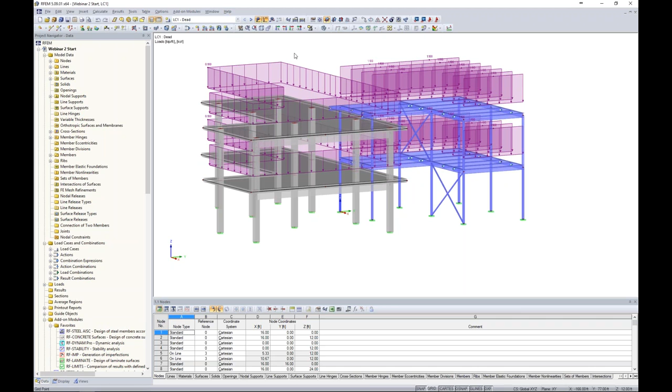Previously we loaded the structure, and we ran our load combinations and got a full analysis. Now that isn't always the case. Sometimes we go to run an analysis after we have loaded our structure, and for example, we have loaded our structure with dead load here. Previously everything ran great, but as we know with any finite element software, that doesn't always happen. So when we go to run this first load case here, as we know from RFEM Webinar 1, this is running according to a linear analysis, and we immediately get an instability.

So instabilities are nothing new despite what program you're using, but I want to show you these features that make our lives a little bit easier within RFEM. The first thing to know is the text about the specific instability. It says this model is unstable. The instability is found at FE node number 64, direction Z. So it immediately gives me a location and tells me that there's some type of issue in the global vertical direction.

The model is statically underdetermined. When I close out of this error message, you'll see that my big red arrow shows me exactly where FE node number 64 occurs. Now, I'm not going to say that 100% of the time this big red arrow is going to point out our issue.

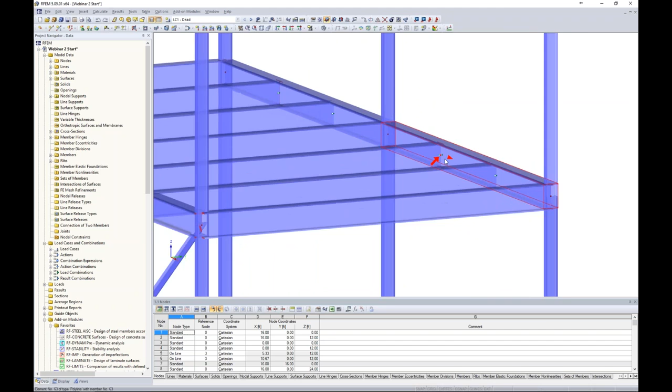But a lot of the times this really is where the issue is occurring. So when I scroll in here, I really don't see anything immediately. When I turn it to a wireframe model, okay, I can zoom in here and see that I forgot to connect my node here of my beam to my transverse beam. Well, that's no problem at all. I can just easily drag and drop that to connect those two members.

So you can imagine that when we have a huge model with a lot of members and we get this error message for an instability, that red arrow is a huge benefit to really narrow down on where that issue is occurring, rather than it being like finding a needle in a haystack, trying to determine if a node isn't connected someplace.

So now we can go and run our load combination again, or this particular load case. We run it. Everything appears to run okay this time. We immediately get our deflections here, which we can decrease the deformation factor.

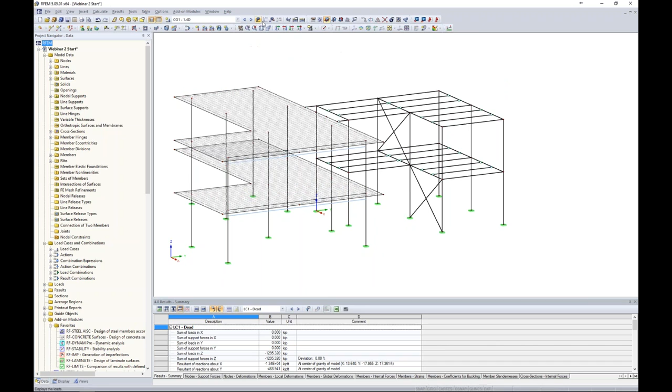So that's great, but now we need to run our first load combination, 1.4 dead load. This is just a load combination from ASCE 7. I take a look at my applied loads. It's applying that 1.4 factor to all of my dead loads, our surface loads and line loads here. Turning this back into the rendered view, I begin my first load combination analysis.

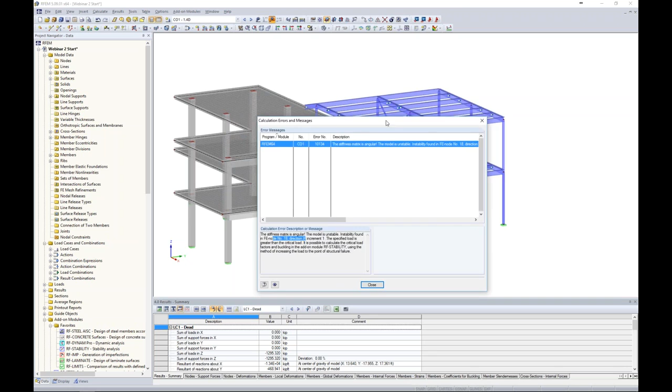And lo and behold, we get another error message. So it's another instability, but this time our text is a little bit different. It says our model is unstable and the instability is found at this location, direction X. So we have a little bit of a different direction affected now. But this says a specified load is greater than the critical load. So this tells me that at this particular location I probably have some type of issue with buckling because the specified load is greater than the critical load.

Well, I can close out of this error message and zoom into this big red arrow here. Maybe I turn this into wireframe. I see that everything is connecting fine. So I don't really understand where this error message could be coming from.

Well, this is where we can utilize our add-on module RF Stability. So from our long list of add-on modules over here on the left in our project navigator, we can launch RF Stability. As you can see, this is just a simple dialog box that pops up within the program, and it allows us to do an eigenvalue analysis for a few different eigenvalues based on the buckling behavior of our structure. And what we can do is import different axial forces from either load cases or combinations.

Now, because I was able to solve for my first load case, dead load, just fine, it makes sense to import those axial loads to see how the structure is behaving based on those applied axial forces. Now, we have quite a few other settings here that I won't get into in too much detail, but we do have an option down here to calculate an eigenvector for an unstable model. So this is if I couldn't get the model to solve at all, so that the causes of the instability can be checked graphically. This is a feature too if we couldn't even get our dead load to solve.

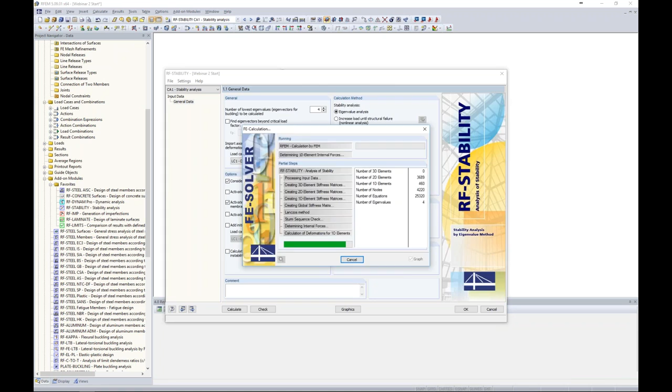Now for this, I will run the calculation and it quickly runs the 4 different eigenvalues. And I'll now see my results available in my tables here. So you'll see I'll have 2 different columns. The first is the critical load factor.

Now the critical load factor is just a factor that I can multiply that applied dead load by before I'm going to see the associated buckling behavior. We have 4 different eigenvalues, so the critical load factors are listed here in ascending order. So probably our most important one would be this first eigenvalue. Now the magnification factor is just a relationship between the moments of a linear static analysis and a second order analysis. So essentially my first order moment times my magnification factor is going to give me my second order moment. But now we're a little bit more concerned with this critical load factor.

So if I take a look at my graphics, we're still in this add-on module RF Stability. We can see that with our drop-down box here, and I have my 4 different eigenvectors here. Looking at the first eigenvector, we can see the buckling behavior of this structure.

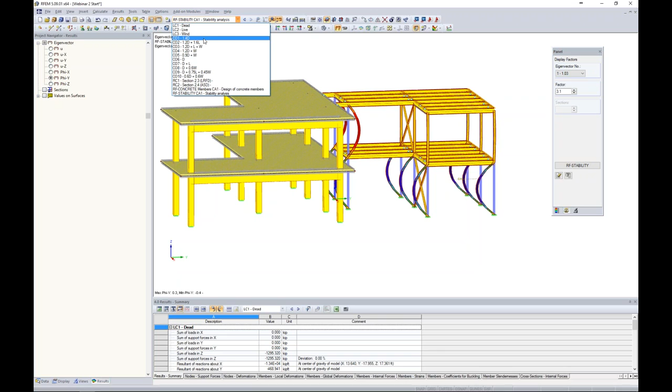Remember, I can only multiply my dead loads by 1.03 before I'm seeing this type of behavior. If I take a look at the other eigenvectors, same type of behavior. It all has to do with these slender columns here. So you can imagine that when I multiply my dead load by 1.03, I see this buckling behavior. So when I'm trying to run 1.4 times my dead load, that's where our instability is coming from. These members simply can't handle the applied loads.

So back under my data tab, at the very top is all of my input data. I can take a look at my cross sections, for example, maybe turn off my results here from RF Stability. I click on my first cross section defined. It's a W6x9, that's a very small number. So perhaps I want to increase that to something a little bit larger.

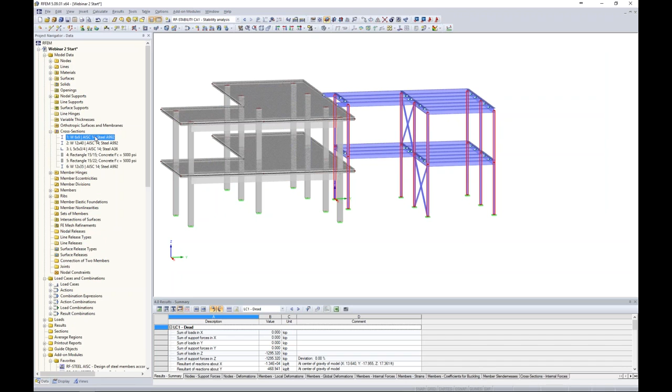Well, I can just right click and edit all of these cross sections at once because they are assigned to a single cross section within the program. Open up my cross-section database, and here are all of my AISC shapes. So we would like to choose something more like a W10x49, much bigger than a 6x9. Still an A992 steel is okay, but obviously we're going to have a bigger cross-section here. So I click OK, and it's asking me to clear my results.

So now when we go to run our 1.4 dead load, run the analysis, everything should run fine because now we have a little bit more of a sturdier member there and we don't see that same buckling behavior. So you can see how RF Stability is extremely useful, not only if you just have an instability, but if you want to see the different buckling modes of your structure. I did a few other webinars where I utilized RF Stability to export as imperfections as well.

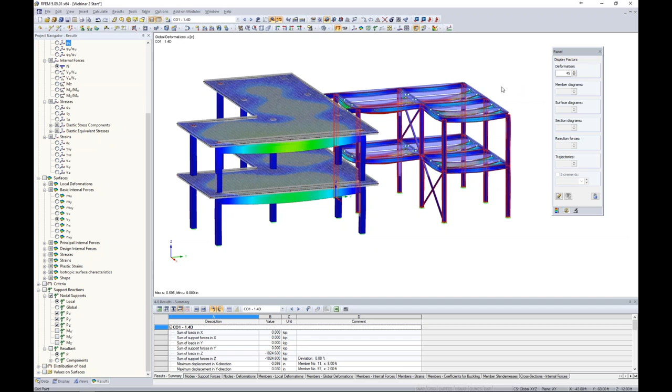Okay, so now that we have addressed instabilities, I'd like to move on to singularities. And the first thing to do is to turn off our results, and let's take a look at our top surface here of our concrete structure.

So if I drag my selection toolbar or selection box over that top surface, I can use my drop-down box here to create a visibility by selected objects. Now you can always right-click and show the hidden objects in the background if you'd like, or you can right-click and turn that off so that we get a clean view of only our structure that we've selected.

Under Views, I can create a new visibility, and we'll call this Top Slab. I click OK, so now I have this user-defined view under Views that I can always refer to despite whatever view I'm currently in. So this is the case when we go to show the hidden objects in the background and we show a wireframe view, that members are always 1D elements in a finite element software. Now our surfaces are 2D elements.

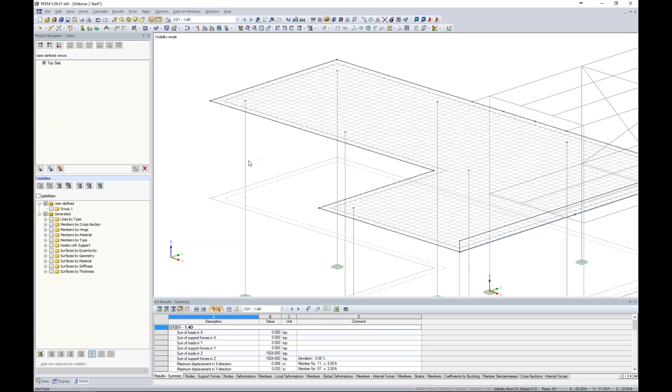But the problem is that where we intersect this column to the 2D surface, you can see here that the intersection occurs at this teeny tiny FE mesh element right here, the single node point. So we can imagine that all of our force transfer is occurring at this single point. So inevitably we're going to get very high stresses, very high forces. If we go to do design of this concrete slab, we're going to get high reinforcement simply because it's a product of the high internal forces at this location.

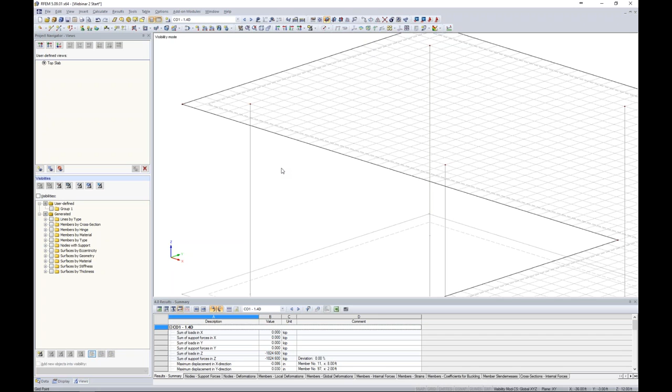Now in reality, when we render this, these columns are 15 inches by 15 inches, so we are going to get some load distribution. And like I said, this is not just for our program RFEM, this is common in any finite element software. So what tools do we have available in RFEM to help us address this so that we are not overly designing our structure?

Well, the first thing, what I'm going to do is jump to a different model here that I have saved, and I have gone ahead and used our add-on module RF Concrete Surfaces to do my reinforcement design. Now I have an entire hour-long webinar dedicated to just surface design using this add-on module, so we won't get into it today. But again, if you are interested in how we can do reinforcement design for this, refer to that YouTube video.

Once we run our analysis in RF concrete surfaces to get design per the ACI, we have our different required reinforcement. The first is AS1 in the top direction. Judging by this red arrow, we can see the reinforcement direction, and you'll notice that where these columns are framing into the slab, we have high reinforcement given there. The same goes for AS2 in the other direction.

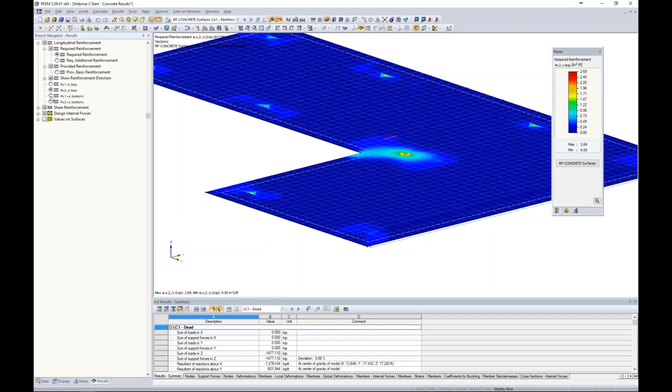Now, when we're looking at AS1 at the bottom, it's not the same, which makes sense. We have a lot of bending at the bottom of our slab between our columns, so that's where most of our bottom reinforcement is going to be. Same with AS2 at the bottom in the other direction.

Now, focusing on AS1 top for our slab with this particular reinforcement design - this is nice in terms of our contours, but perhaps we'd like to see this in a more numerical value. We can do so with sections, and with our first section, up in the dropdown we can create a new section numerically. But before that, right next to it, we have the option to completely turn off our ISO lines. These results will still be available, but I'm simply turning off those ISO lines to make my section cut right down through the center of my slab.

A section is exactly what you would think of it. It's going to give me the internal forces, or my results, at that particular location. So we can create this section numerically.

The first thing I need to do is give it a section name, section 1. It will be a section cut through my surface, and I can apply this to my single surface number 2 by clicking on that graphically. The next thing to define is my start and end points for the section.

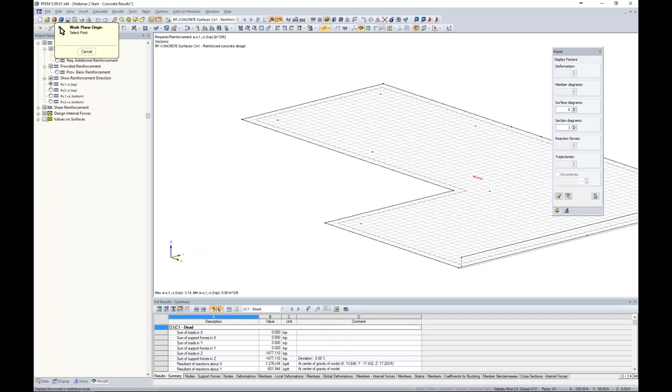What I like to do is turn on my drawing grid down here, activate that at the bottom, change my origin for my drawing grid, and choose my two points by zooming in, right down that column line. My second point will be located at the second end of my slab, and because of those AutoCAD-like features, the program does a great job of snapping to the points I'd most likely want for my section. Now, for the section on surface, the projection direction, we can have it in the global X, Y, or Z orientation, or define our own vector if we want it at some angle.

Once I click OK, it immediately brings me into the results diagram for my section, and you'll see the exact same results we were viewing in RFEM. In particular, we take a look at our reinforcement design per RF concrete surfaces - here are those spikes in reinforcement where our columns are framing into our surface. I think we can easily say that this is being over-designed for those internal forces.

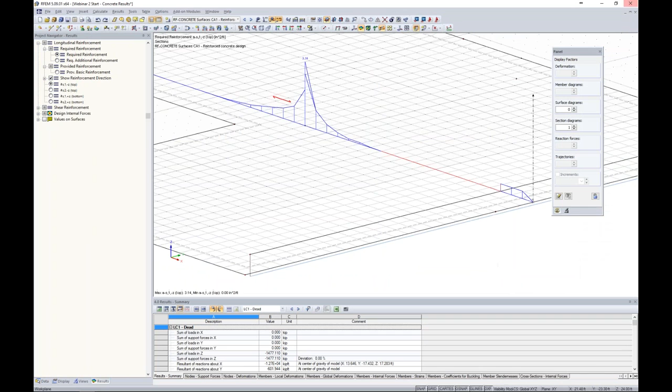Now, I can always exit out of here and view these sections graphically on my surface as well. So going back to the results diagram by right-clicking, I want to show you guys a useful feature called smoothing ranges. Up at the top is the option to edit our smoothing ranges.

My first column occurs 3 feet from the edge of the slab. My second column occurs at 20 feet from the edge of the slab, and my third at 41 feet. So what I'd like to do is smooth out the range, maybe 1 foot on either side of the column for a 2-foot range there. This is to account for the load distribution that's occurring, which in reality the program is not accounting for.

So what we can do is define our different ranges. For example, for our first column, the beginning will be 2 feet and the end will be 4 feet. The program automatically calculates the length as a total of 2 feet for that first smoothing range. The second will be from 19 feet to 21 feet, and lastly, for our third column, it will be from 40 to 42 feet.

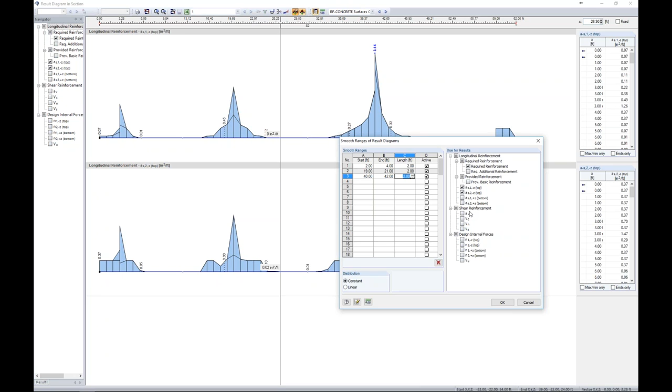The program automatically assumes that we'd like to apply these smoothing ranges to what we're currently looking at, but we can always activate and deactivate different results available here. Now when I click OK, you can see the smoothing range applied.

For example, column number 3, we went from 3.14 inches squared per foot to 1.65 inches squared per foot. So this is extremely useful in the sense that we can print this to our printout report.

We can even use this drop-down box to pull up one of our other load combinations. I'm going to clear out all of these result diagrams and just activate my MX and MY. Again, we're seeing those spikes in internal forces here. I can go back to my smoothing ranges and simply activate the checkbox for MX and MY for all 3 of these ranges, so when I click OK, you'll see the smoothing range applied here as well.

Now one thing to note, if we jump back to RF Concrete Surfaces, the smoothing ranges are shown here, but if I were to exit out, they are not shown graphically within the model.

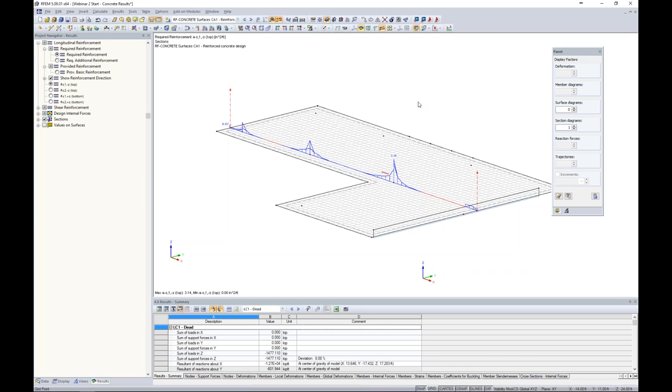So the question is, how can we apply this so the program actually designs for those average forces, rather than us just putting a fictitious number after our results are shown in the smoothing ranges? One thing I forgot to mention, if we take this section cut and highlight it, hold down the control key, we can copy it down this other column line to give us perspective on some high design forces at this location too.

So smoothing ranges are great, but if we go back to our data tab, we'll see these sections available here. We have section 1 that we just created, and here's our second copied section. There's another feature called average regions.

If I right click, I can create a new average region. For this, we want to apply it to a particular surface, so I graphically select surface number 2 here. You'll notice I have 3 different forms I can select for my average region: a rectangle, a circle, or an ellipse. For our particular case, our columns are rectangular in shape.

So it's probably most beneficial to use a rectangular averaging region. But maybe you have a circular column framing into this slab, so that can be utilized as well.

The next thing we want to do is define where we want to apply the center of the averaging region. We'll apply it to our first column here. For the dimensions, if we want to average it out over a 2-foot section for both our A and B dimensions shown in this picture, we can.

Now you have a lot of control over what internal forces you exactly want to average. The program assumes that for the local axes of our average region, U and V, we want to correlate those with the X and Y local axes of our surface. But in reality, we can activate all 4 of these if we just want to average out everything together, independent of what our local axes are doing.

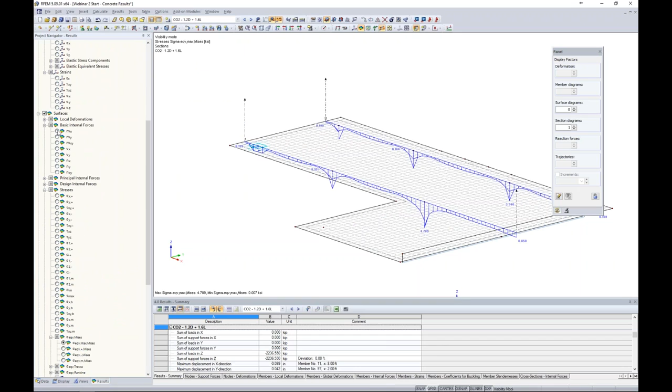So if we click OK, we get our first average region. Now, to make this very clear what we're doing, I'm going to jump to one of these particular load combinations, and under my results I'm going to activate my sections. So we're still viewing our sections here, but for my MX forces—this isn't my concrete design now, this is my internal forces MX.

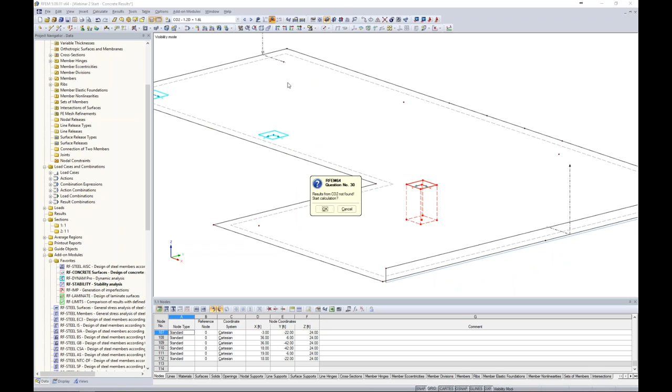Now with this average region, all I have to do is select it, hold down my control key, then take it, drag it, and drop it. It's asking me to clear my results, that's fine, and drag and drop it to some other region here. Now I can rerun that same load combination rather quickly, and we will see that average region now applied.

Now previously this was something like 83 kips per foot, so you can understand that this is now going to give us less internal forces.

Now if we jump back to RF concrete surfaces, it looks like we lost our results here, so I'm just going to quickly rerun that.

All this is doing is applying the ultimate limit state designs for all of my load combinations to do my reinforcement design. But what I want to show you with these average regions is that my AS1 top is still showing 3.16 inches squared per foot.

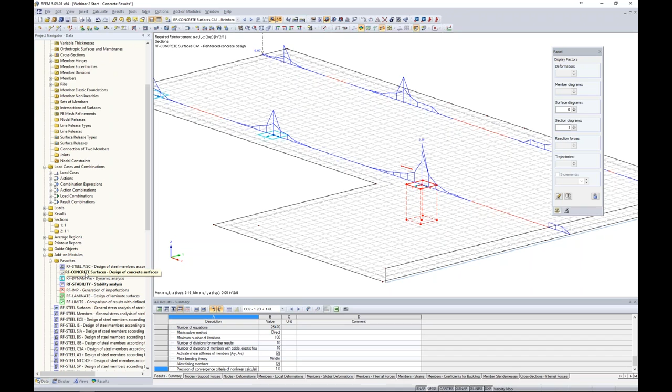So this average region did absolutely nothing to help us. Why is that? Well, back under the Data tab, under the Concrete Surfaces add-on module - for a more detailed look into this module, refer to our previously recorded webinar - but when using average regions for concrete design, under the Details tab, this option is default checked off.

What we'd like to do is apply the average internal forces for our ultimate and serviceability limit state designs, so now we want to check this checkbox. I click OK, I click OK.

We've lost our results again, but we can easily run a quick analysis, which solves rather quickly because now it's taking those average internal forces to give us our reinforcement design. So now we have gone from 3.14 to 1.83. This is how we can apply average regions to address singularities within the program, especially for something like concrete design.

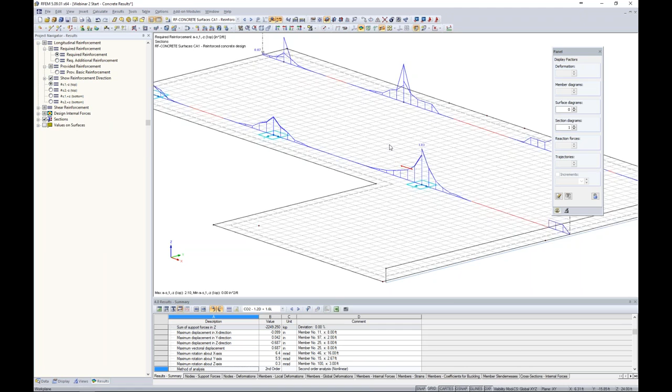Okay, so that is what I wanted to look at in terms of singularities. Now switching topics, I'm going to cancel my visibility mode here and render my model.

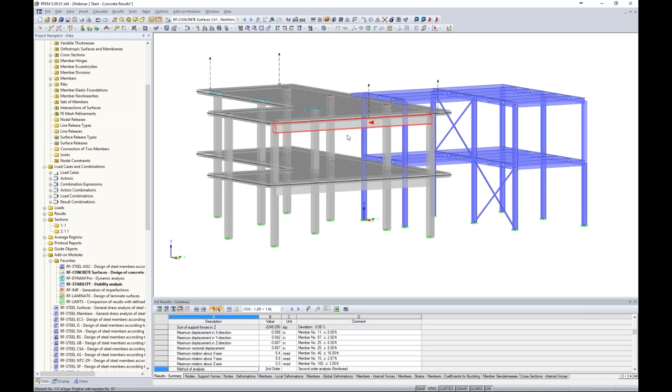In RFEM Webinar 1, if you were present, we created this beam member here, and it's actually a rib because we wanted to span from this column to this column, but we didn't have an intermediate column, so we applied a rib member. If I double click on this rib member, you can see the member type is set to that, and previously we had defined effective widths for this rib member to take into account for analysis, but also designed for our reinforcement per the ACI.

Now let's say we have a situation where we actually have a precast element, and the precast slab is sitting on this precast beam, and it's not a monolithic pour like what we'd see with a rib type member. In reality, I want to fully release the moment. Maybe I still have resistance for lateral movement and vertical movement, so X, Y, and Z are fixed, but no moment will be transferred between the two.

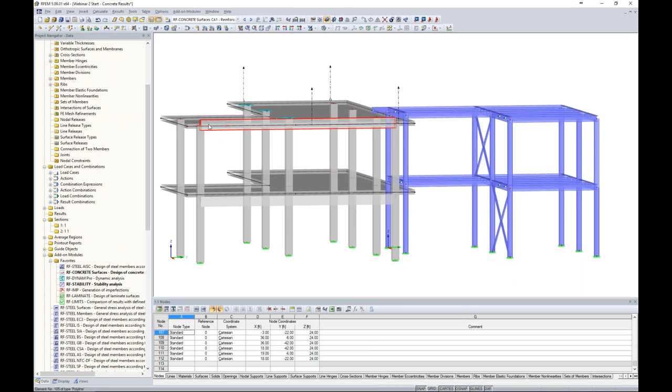So what I'd like to do is not have this set as a rib, but set it to a beam member. When I click OK, it asks me to clear my results. My typical member is modeled directly at the center line, same as the slab, but in reality I'd like to still drop this beam down below the surface. So how can I apply an eccentricity?

If I double click this member, we have a tab here called Options, and that's where you'll see member eccentricity. Now we need to define a new member eccentricity. You'll see here that we have not only the local axis system X, Y, and Z for a member, we can also set it according to the global X, Y, and Z.

The local might come in handy because if we are modeling a member at an angle, then obviously we want to apply the eccentricity according to the local axes rather than the global. Now we can also apply this movement of the beam in X, Y, and Z, so not necessarily just vertical eccentricities, but left and right too.

Typically with this situation, I would need to understand what's half the depth of my slab, what's half the depth of my beam, add those together, and manually apply my eccentricity. But we have automatic features in the program that can do all of that for us.

You can see here that I have 6 different options of where I can select my beam to be, for the eccentricity to be applied to. This little red dot highlights exactly which option I've selected. So I'd like the top of my beam, and I want to offset it according to a surface, so then I can graphically select my surface number 2 here, and I want to offset it from the bottom of that slab.

So now when I click OK through all these dialog boxes, we can see that beam was dropped down below the bottom of the slab. This is the same concept as the rib member, but now we're not taking into account that effective width.

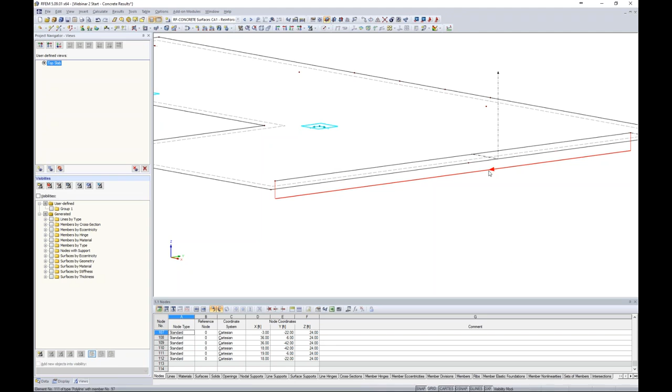So how can we automatically do this without individually modeling these little rigid links, what we may have to typically do?

Well, in the program, we have a feature under data, and if I scroll up to my input data here, you'll see a line release. So what I can do is right-click to apply a new line release.

The first thing the program asks me to do is define the line, and I will apply the line that I use to create the member. If I try and click the member itself, it doesn't allow me to do that, because that's not in reality where the member was modeled - it was applied to this line integrated within the surface. Then we create a line release type.

So with a line release, we have the ability to apply releases in the translation directions X, Y, and Z. You can see that we also have partial fixities here, so maybe we don't have a full release or a full connection here, but we can apply that partial fixity spring constant, and we can get into things like nonlinearities.

Nonlinearities might be very important for something like friction. If we choose one of the friction options here, then we have some different settings based on friction coefficients that will allow us to emulate that same connection type.

Now, keep in mind that these are the local axes of the original line. So surfaces have their own local axes, our beam has its own local axes, and so do our lines. So we're not releasing any of the translation or rotation directions of the beams or surface, but rather the line itself.

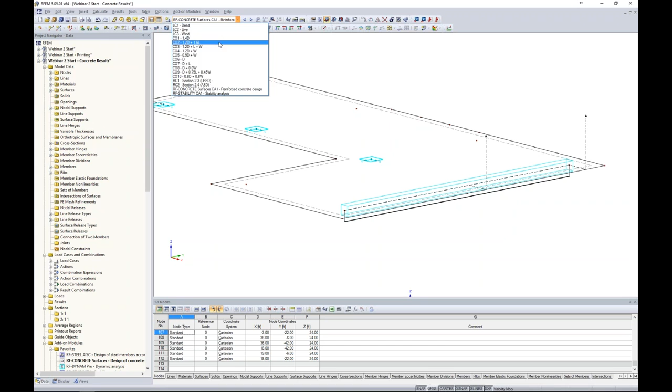So now if I were to run one of my applied load combinations, such as 1.2 dead, 1.6... well, we can run this load combination, and again, we're just viewing our initial view here, and I'm going to turn off my surfaces. And we just want to take a look at our member design. I'm going to turn off my sections.

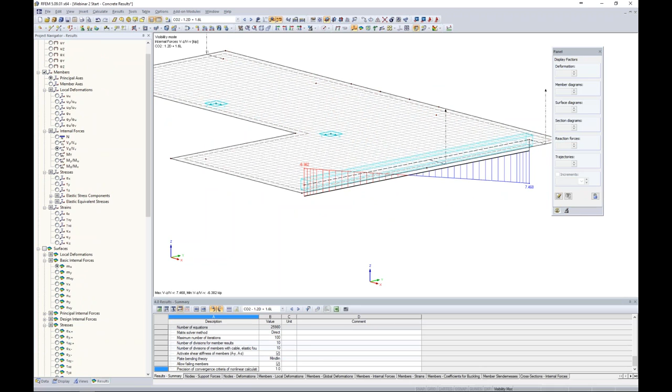And rather, we're taking a look at our members and our internal forces for torsion. So you can see here that we still have a small amount of torsion along the member length of 1.933 kips per foot. But what would this look like had we not released that particular moment along the member length?

So this is how we can effectively apply line releases in the program, if for example, we did not want to connect our surface to our beam element.

Okay, changing topics once again, I want to move on to result beams. For this, I am going to cancel out my visibility mode here. Let's render our model and move on to result beams.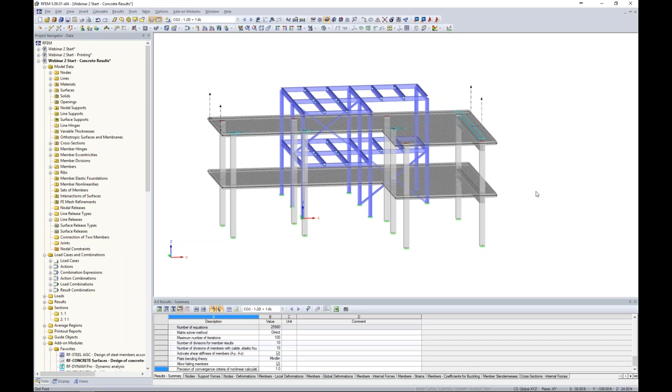So what I'm going to do is first create a new user-defined view here, using my drop-down box, visibility by selected objects. Keep in mind that behind the scenes, when I show my hidden objects in the background, this steel section is still here. So under my views, I can create this new user-defined view.

We'll call this one concrete structure only. I click OK, and I'm going to turn back on my grid. I'm going to redefine the origin at the base of my structure. I'm going to hold down my control key to select these two members, and once again holding down control, copy them, drag and drop them to a location parallel to the concrete structure.

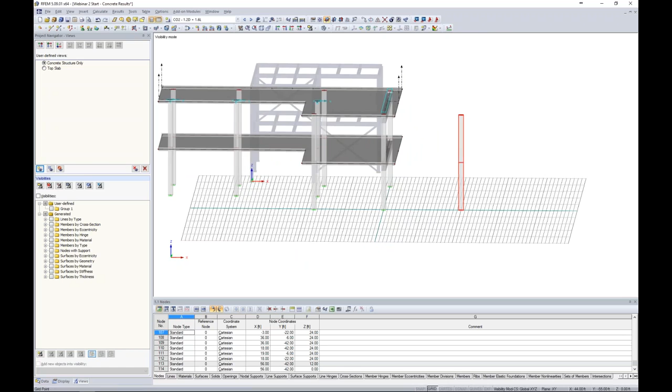So what I'd like to do from here is select these two members, right-click to edit them, and under the member type is where we can choose result beam. Now, a result beam is simply going to take the information from other objects in the model and apply it so that we can view the analysis results as a member internal force.

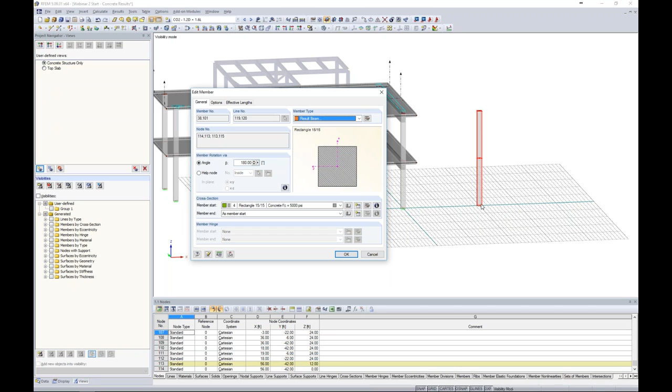Result beams don't add to the stiffness of our structure. We're not applying them to an analysis, it's just a different way to view our results. As far as cross section, it doesn't matter if it's concrete, steel, aluminum, or your own user-defined section, you can choose anything here. You'll also notice I don't even need to put a support at the base of this column section. What I need to do here is define some additional information.

As far as result beams, we have 4 different options. The first is within a cuboid quadratic, which uses a quadratic integration area where the centroid of all the elements I'm trying to incorporate within this result beam needs to be located within the member's axis, meaning the axes of our actual result beam shown here.

I'm not going to use this option today, but we will be using this second option as our example: within a cuboid general. This applies a rectangular integration area where the centroid can vary according to the local axes of our member.

The third option is within a cylinder, which uses a circular integration area where the centroid must be located at the member's axis, again clarified here with this nice picture we have. The last option is to choose from listed including objects.

So here is where I'm going to start my first example of a result beam. I want to select the surfaces I'd like to apply to this result beam, so I can just highlight everything. Remember, my steel is in the background, but since it's not selected, I don't have to worry about it. As far as solids, we don't have any, so we can leave this as all or none. And for members, we want to graphically select all of our concrete members here.

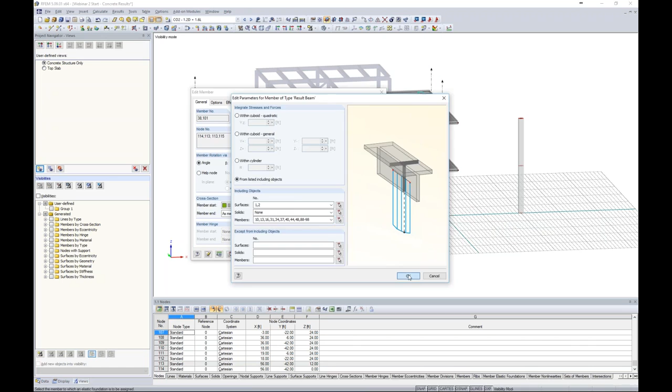Now I'm going to run one of our load combinations where I have a lateral load applied. You'll recall from webinar 1, we applied a wind load in the Y direction here with some gravity loads. So if I run this first load combination, you'll notice that after the result is complete, I have my member over here with some results as well.

So what's exactly happening? Well, I want to view my results on my members like I would any other member within the model.

What this is doing is incorporating all of my objects here and applying it to my result beam. Just to summarize what's exactly going on.

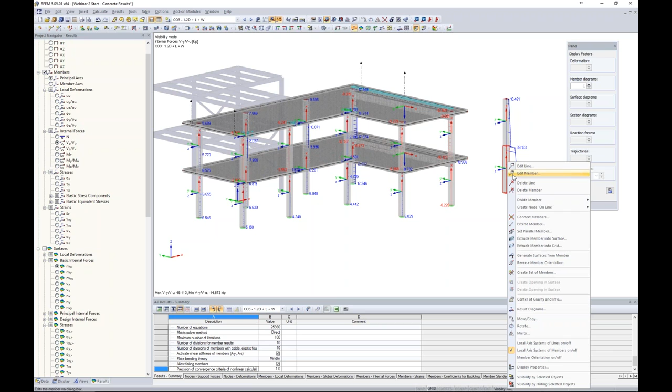As far as viewing my shear forces in the Y direction, this is the local Y direction, so I can always right click and turn my local axes of my members on to understand exactly which direction I'm looking at here.

The local Y is going to give us my story shear information. For example, the top story is going to be 10.46 kips for this particular load combination. My first story shear is going to be 39 minus the 10, and finally I have my base shear given here at 48 kips. If we take a look at our shear in the other direction, we hardly have any forces at all, that's just because we haven't applied any lateral loads to this.

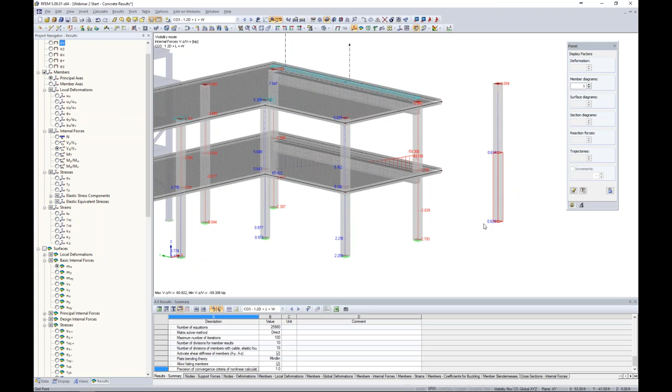Now lastly, we can even take a look at our axial loads. So why would our axial loads be important? Well, if we're interested in the sum of our forces, I can see that for my concrete structure only, my sum of forces in my Z direction is 1,455 kips. Now this is different from my table down here shown in my results summary, which also gives you the sum of the loads in the Z direction, but this is for the entire structure, including the steel structure over here. So again, results beam would be beneficial for only part of your structure here.

Now, the moments are not applicable in this case, and that is because we have moved the members of this result beam away from the centroid of the objects that we're interested in. So just keep that in mind when we're looking at something like moments, we can't get an accurate representation here. I'll show you in just a minute how we can do so.

But first, I want to quickly jump back to the PowerPoint here to explain what's going on. So as you saw with a result beam, we're integrating the results from a list of objects.

Now, these result beams only include the elements within a rectangular axis of the member start and end. A perfect example, this is a result beam shown here, so this is completely applicable to what we had just seen. These fictitious turquoise planes here show you that the result beam's analysis and what we're seeing for those actual internal forces are only going to be defined within these two planes here, which are controlled by the member start, member end. So this red shaded portion here of our surface elements will not be included in the results, and that's just defined by the member start and member end.

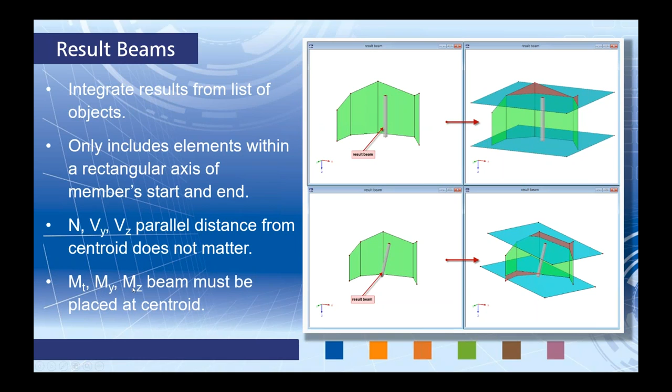Going back to the PowerPoint, now our moments, which I just mentioned, torsion, strong and weak axis bending, the beam must be placed at the centroid.

So let's move on to a quick second example then with our result beams of how we can utilize this to view our moments. For example, if I'm interested in my top slab here, which we can go back to our user-defined views, and I really want to design a 4-foot wide section here on my slab, and I want to pull those internal forces from that 4-foot wide section.

Well, a section cut isn't going to work here because a section cut only gives me my internal forces at that exact location, exactly what it is, it's a cut. So in order to utilize a 4-foot section and pull those internal forces, we want to use a result beam. So what we can do is create a new beam member here, and instead of the member type beam, we will choose result beam.

And again, the cross section does not matter. We could choose anything that we like because we're not contributing to the stiffness of the structure in any way.

We want to move on to the details of this result beam, and this time I want to choose within a cuboid. So if I'm interested in a 4-foot section, that means I want to choose 2 feet on either side of my result beam, which is laid out clearly within this picture.

As far as my vertical direction, this isn't as important because I don't have any members modeled above or below. I'm only interested in this slab, so 1 foot is more than enough. But if I had any elements within this 2-foot vertical section, they would also be included in my results, so just keep that in mind.

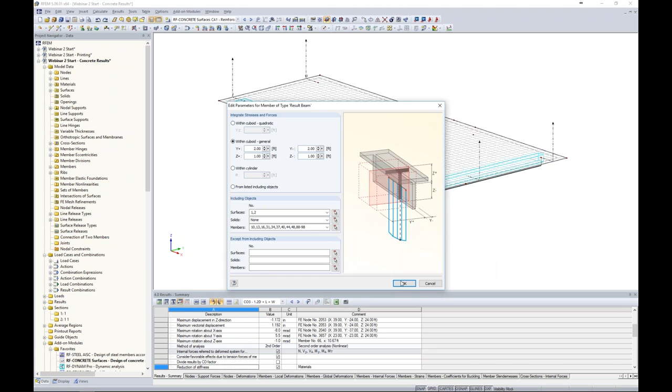This list is no longer relevant because I'm using only this section up here. So when I click OK, I can begin modeling my new member. I will snap to the middle point of this line over here to make my result beam section right down the middle of this slab.

You can see the program automatically snaps to the perpendicular section, just like what we'd see in AutoCAD. And here is my result beam, so we can see that 4-foot wide section. We can even render this if we'd like a clearer view on what's exactly going on.

So now when we take a look at our results, I will run one of my load cases here—it doesn't matter, 1.2 dead, 1.6 live. I'm going to run the analysis.

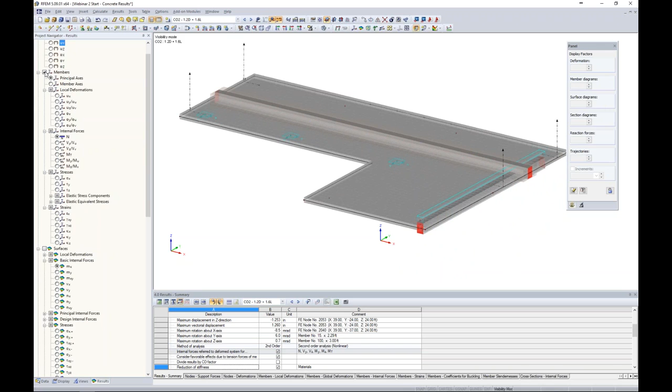As far as our result beams, we can view them as we would any other member, as I mentioned before. So the first thing we want to do is take a look at our member internal forces, and perhaps we're interested in the moment.

So let me turn this to wireframe view. Now our moments have a nice smooth diagram for my beam member here. So what's going on with this results diagram? It's pretty choppy.

When you're using a result beam like this, under Calculate, Calculation Parameters, we want to change the number of divisions of our members for result diagrams. The default is set to 10. Let's actually change this to something like 100.

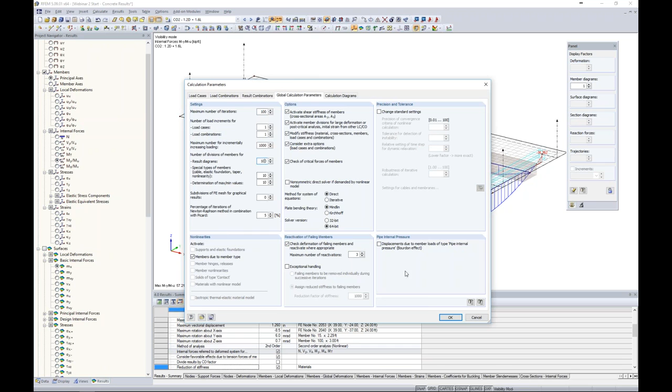I click OK, my results will inevitably be cleared. I quickly run this analysis again, and we'll see that our results look much better. So that can impact the way that you're viewing your results.

So you want to make sure and increase those numbers of sections here if you see any type of discontinuities that we saw with the beam before. So now we can see that our moment diagram is displayed quite nicely here for our strong axis.

So remember, these are the internal forces for our 4-foot wide section, and we can take these internal forces and go and do our own design.

We can take a look at the weak axis bending here. We can even take a look at axial and shear forces. These are all relevant within this particular section.

But this is what I'm saying when you want to take a look at the internal forces of our moments: the centroid of our elements that we're interested in must be at the same location as our result beam's axes. So just something to keep in mind there.

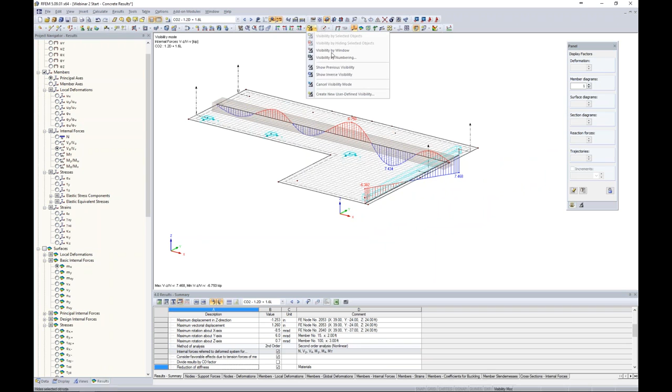Okay, so now that we have seen a little bit more about result beams and focused heavily on our concrete structure, let us cancel this visibility mode to take a look at our entire structure. And I'm going to render it.

Maybe I'm interested in the steel structure, and in particular I zoom in here and I want to take a look at this connection here. Now this connection is pretty straightforward.

We have members framing in at 90 degrees, but if we didn't—let's say we had tapered members, maybe members framing in at a weird angle—well, this might flag us to think, okay, perhaps we'd like to do a finite element stress analysis for this connection.

But if I turn this into a wireframe view, I cannot do a stress analysis of this connection because all of my members are 1D elements. So we can get stresses along the member length and the member as a whole, but not for this connection.

So what would we like to do about it? Well, the first thing to note is that this member, judging by this big red arrow shown here, the member end is framing into this node.

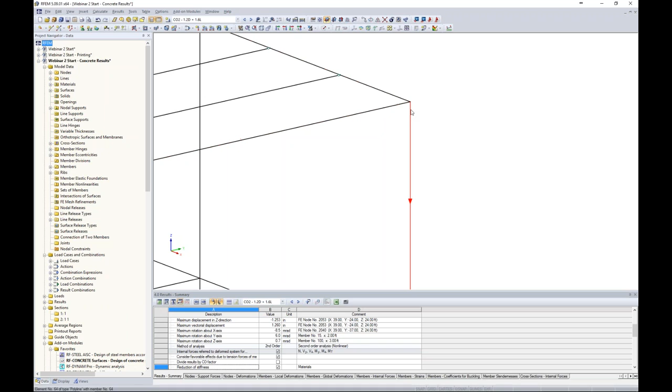The same goes for this member, but this third member starts framing at that node. So what I can do is right-click to reverse the member orientation, and now all three of my members will be framing into this single node.

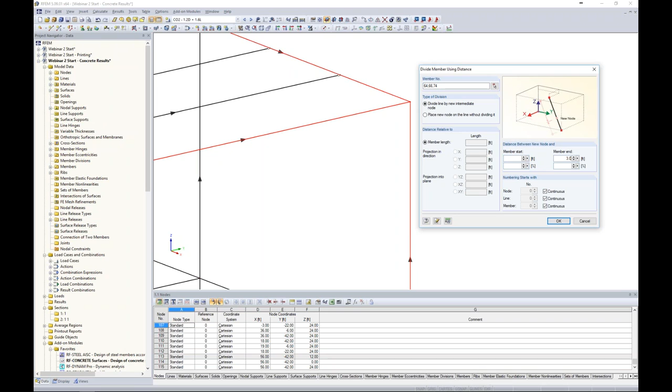I'm going to select them all, right-click, and choose to divide the member by a certain distance. Because I switched around the member orientation, the member ends are all located at this particular node, so 3 feet from the member end is where I'm going to divide it. I've done nothing more than create smaller members out of my initial member length.

If I render this, sure, we get this rendered view of our W section, but turning it back into wireframe view, I'm going to highlight all three of these members, right-click, and under member choose the option to generate surfaces from members. So now we've taken these 1D member elements and turned them into 2D surface elements, which will allow us to do a stress analysis on this particular connection.

Now, the first thing I want to do is under my display, turn off my FE mesh refinements. I'll get into this later.

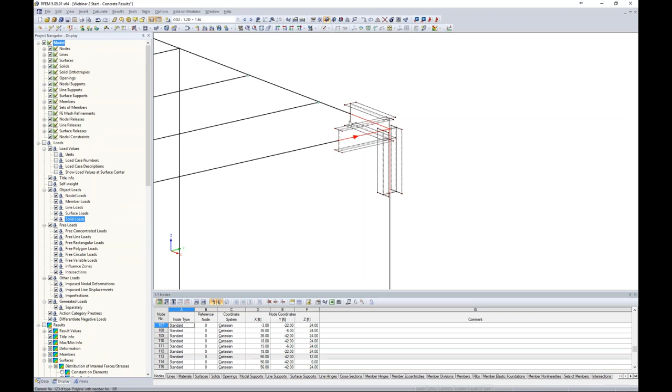I wanted to mention that this W shape was previously a W12 by 35. This new W shape generated by the surfaces has all those exact properties. For example, the web surface here has a thickness of 0.31, taken directly from the W shape. All of my dimensions, materials, and thicknesses were taken from that member modeled previously, so I don't have to make any changes in regards to that.

What I do need to do is clean up the geometry a little before running my analysis. So I can highlight all of my members and create a new visibility by selected objects.

Maybe I want to show my hidden objects in the background. This is a nice little trick, even for our users of RFEM who've been using the program for a while. If you didn't know, you can select one of these elements, and if you hold down Alt on the keyboard, that will allow you to rotate about those selected elements. Just a nice little feature to utilize there.

Now, to clean up the geometry, I'm going to start by deleting these center lines. They're no longer needed. You'll see that the column is a little bit low here, so I'd like to extend it up a little above my beams.

So how I can do this is zoom in here, hold down my control key to select the 6 nodes that comprise the top of my column, and use my move tool. I'm only going to move this 0.58 feet in the Z direction, so 7 inches, and click OK. Now you can see that the column was simply moved above those beams.

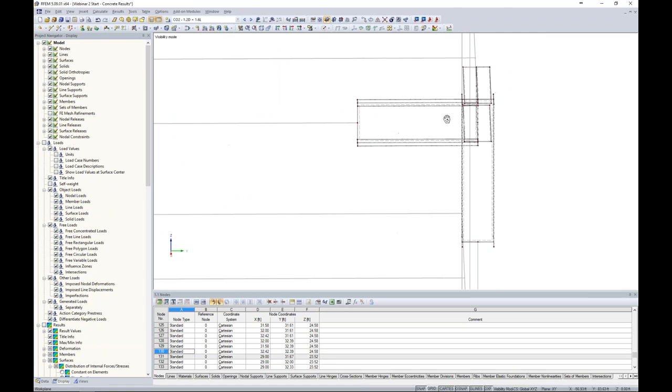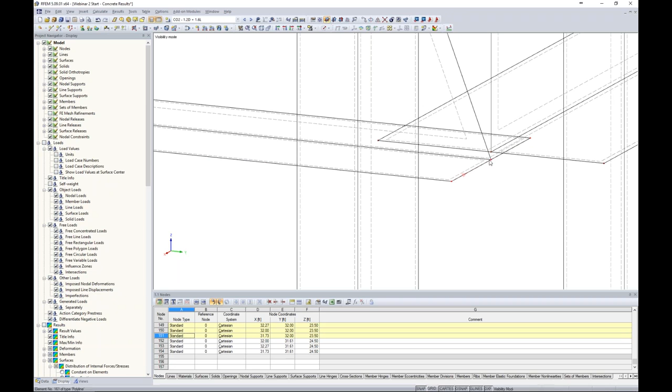Now the next thing is to move this beam here on our left to the face of the column. That's pretty easy. If we rotate our model and zoom in, I can select these 3 nodes that entail the top of this beam and drag and drop them to the snap point on the face of that column. Those AutoCAD-like features allow us to snap to the most important parts of the model. I do the same thing for the bottom, simply snapping to that point, and now that beam is framing in quite nicely to that column.

If I take a look at my rendered view, we can see that the rendered view of our 1D elements transitions quite nicely to those 2D surface elements. But if I look at my wireframe view, these 1D member elements are framing into this 2D surface element at a single FE mesh point.

This is a singularity. By no means do we want to use an average region here, because in reality this whole load from this 1D member element should be distributed to the entire face of this beam. So how do we distribute that load? That's where we can apply a little rigid plate here at the end of our member.

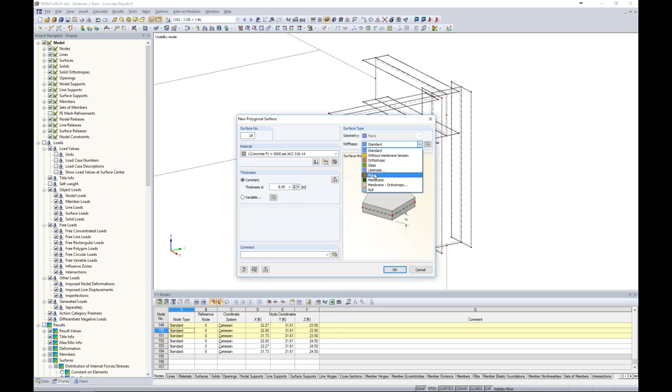Under our surfaces in the drop-down box at the top, we can choose something such as a polygon. As far as stiffness goes, I want to set this to rigid, so pretty high stiffness here, not infinite, but very high within the program. I click OK, then draw in this little rigid plate at the end of my member, and now that load will be distributed as such.

The same goes for my other beam locations. If I don't take care to draw in this little rigid plate, I'm going to get singularity issues at all these other locations. So I'm just snapping to the 4 points of my column. If I render this, I can see these plates are shown with the pink color, which shows me it's a different material.

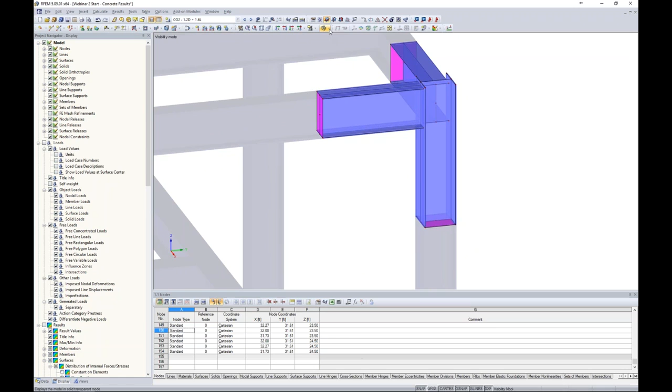Now, a couple other things to take care of before we're ready to run our analysis. Going back to wireframe view, under Calculate, FE mesh settings, we see the global FE mesh settings are set at 1 foot. Sure, 1 foot is great for our huge slab element of our concrete structure, but when we're looking at something as small as this connection, 1 foot is not ideal. So rather than changing this global setting, when I made that transition to these 2D surface elements, the program actually put in these FE mesh refinements for me.

That's denoted by this little symbol here. If I double click on it, I can see that the FE mesh was defined for each individual surface with a target FE length of 1 inch.

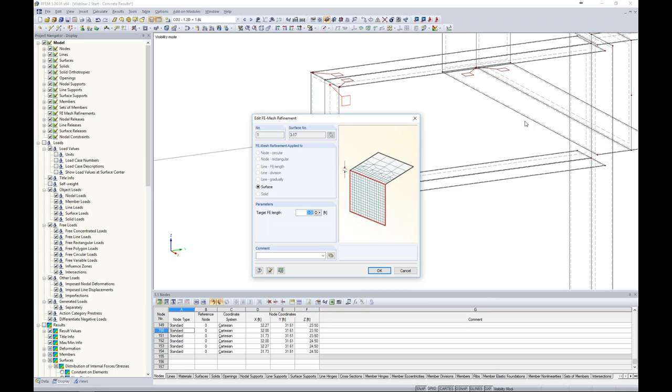This is more beneficial because if I were to apply 1 inch to my global settings, applying a 1 inch FE mesh to all my slab surfaces, my solve time is going to be much higher. The more FE mesh elements you have, the longer it's going to take to solve. So it's in your best interest to utilize these FE mesh refinements for situations like this where it requires a smaller mesh here but not anywhere else within the model.

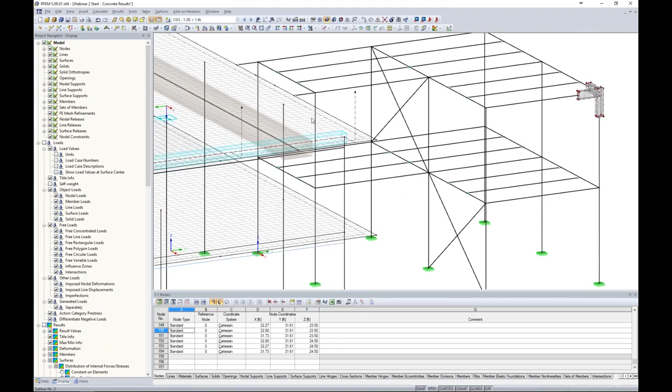Now when I go to Calculate, Generate FE Mesh, and let me cancel out of my visibility mode, we can see the FE Mesh is automatically generated. Everything ties together quite nicely. I don't have to manually submesh anything here. But when I look at my concrete surface over here, the FE Mesh is still 1 foot, so that looks great.

Keep in mind, we can always apply our own FE mesh refinements. For example, maybe I have some critical points where my beam is framing into my web, and I can hold down my control key to select 2 nodes. I can right-click to add an FE mesh refinement. For this one, I create a new definition type, and the node is automatically selected because the program knows this is what we selected back in RFEM.

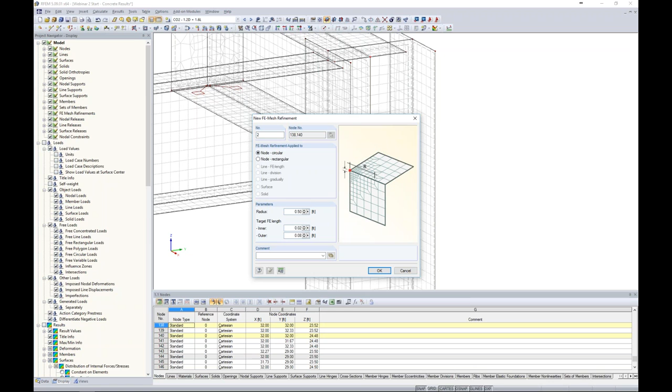We can give it a radius of 0.5 feet or 6 inches. Maybe our target length for the inner portion of the circle is 0.02, and the outer will transition back to that 1 inch, or 0.08. I click OK. Now the program puts these symbols at those locations for my FE mesh refinement. I can go to Calculate, Generate FE mesh, and now we can see the program has created this smaller mesh at this particular location, and it transitions nicely back into our surface mesh.

Under the Display tab, we can always turn off these FE mesh refinement symbols. The FE mesh refinement is still there, but we just don't need to necessarily see those big symbols.

In regards to our connection type here, originally I modeled this structure so that it has a fully rigid connection of this beam framing into this column's web. But maybe I go back and decide I'm going to have some type of weld here, and this weld is not going to have a full moment transfer. So I want to relieve some of those moments within the beam framing into the column web. So how do I apply that to this connection?

That's where we can utilize line releases again. We're going to come back and apply line releases on a much smaller level here. So back under the Data tab, under Line Releases, we want to choose the option to assign a new line release graphically. Here, I don't want to override my previous line release type because this is my beam to slab connection that we talked about earlier.

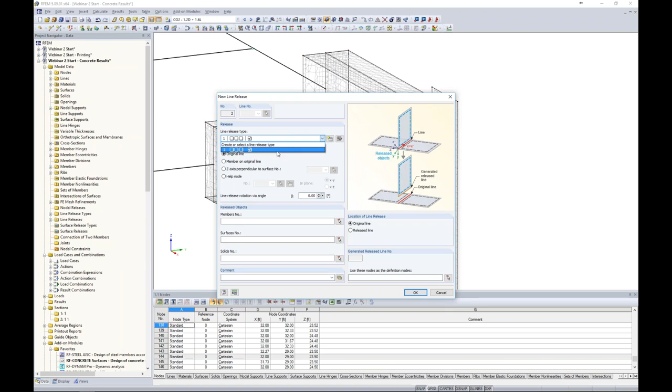So what I'm going to do is simply create a new line release, type number 2. I want to release this moment, but maybe, like I mentioned, we have some type of partial fixity here with the weld type we're using, so it might be something more like 40 kips per foot for partial fixity. I can click OK.

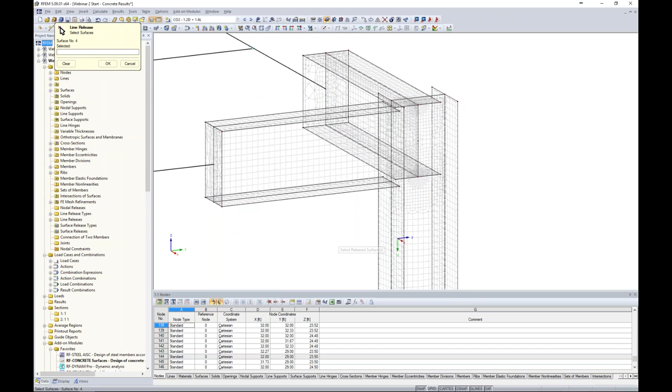The surfaces that I'd like to release these lines from—I select my web element and click OK. Now when I exit out of this dialog box, I can graphically select these lines where this beam is framing into this web. So now you can see my symbols showing my line release here, and under the display we can also turn those off if we don't want to see them.

We're almost ready to run our analysis, but let's take one final look at our applied loads. We'll jump to our dead load here and see our applied loads. Now these are member loads applied in kips per foot along our various steel members, but we no longer have members, so we lost those applied loads.

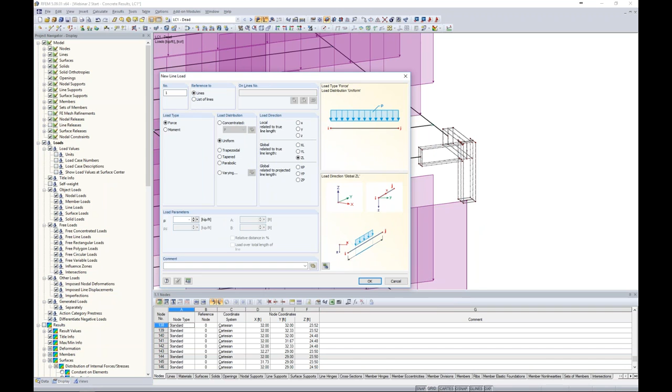In a similar sense, we can apply the same load magnitude but this time as a new line load. Line loads are applicable for something like a surface, for example, where we don't have a member available. We apply it in the global Z direction with a magnitude of -1.1 kips per foot. I can scroll in here, apply that to the top of this beam, and you can see it transitions quite nicely from our beam to our surface element.

Now the same thing can be done for our live load. We'll apply a new line load here, but this time we want to give it a new load magnitude of 0.3 kips per foot. I click OK, and then I can apply that to the top of this beam.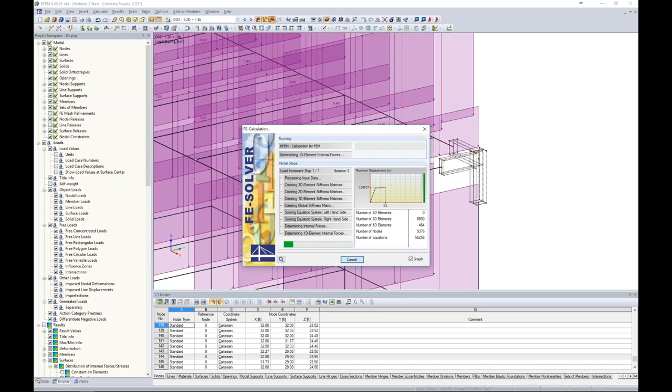So now we can run our first load combination. Here I'll just apply 1.2 dead plus 1.6 live, and we can run our analysis. Keep in mind this will take just a split second longer because we've now introduced these new finite elements for this connection into the program. As you can see, it still solves rather quickly.

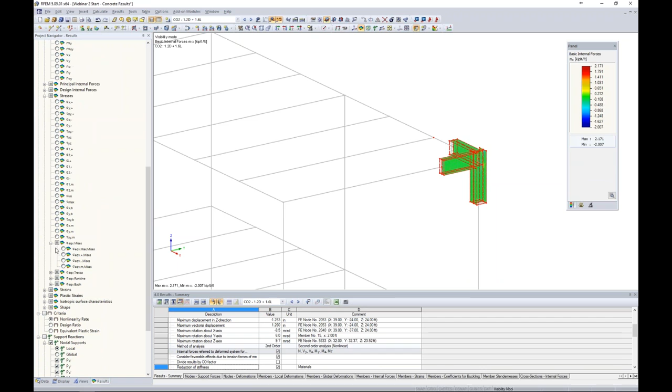We can turn off our loads, and I'm going to choose a user-defined section here, visibility by selected objects. Now under my results, I'm most interested not in my members but in my surfaces, and under surfaces we have our von Mises stresses. So when I take a look at this particular connection and my von Mises stresses—maybe I select my point here to rotate about that—I have some pretty high stresses here at these critical points, as you can see, 160 KSI.

Now you'll notice that the program is smoothing all of these internal forces together, and that's just so we can have a nice, pretty picture of what's going on with our connection. But in reality, this isn't the correct way to view our results. It's so important with any finite element software that we pay careful attention to how we're viewing these results, such as stresses on our surface elements.

Now, with my AISC Advanced Steel Design webinar, I did an entire hour dedicated to a connection just like this and went into much more detail, but obviously we're almost out of time today. So the only thing I want to show you is that rather than tying it together with this smoothing algorithm, we'd rather view our results here under our display tab in our project navigator.

Under surfaces, for the distribution of internal forces and stresses, we'll view this as constant on elements. So now each particular FE element has its own contour, and we're not trying to tie those together—our stresses went down from 160 to 121. They're still high, but you can see what a difference that makes. So now that we still have extremely high stresses, I think we're all in agreement that this is much beyond the yield strength that this connection type can handle.

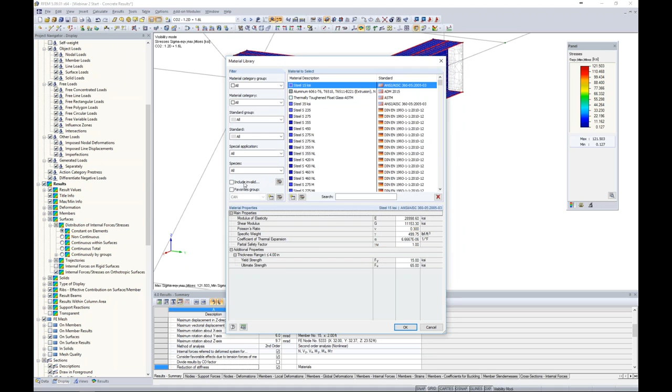Again, I'm just going to go to my material database, which we covered in Webinar 1. I'll activate my favorites group to select Steel A992. I still want all those same properties, but for my material model I'm going to choose isotropic plastic 2D/3D, which allows us to do a plastic analysis within the program.

We can get into complicated details like tearing and yielding, and we can change our strain hardening modulus. For this example, our yield strength is set to about 50 KSI, and our strain hardening modulus is given as such. I'll click OK through these dialog boxes, so now I've changed those surface elements to use isotropic plastic 2D, but the rest of my steel elements still use an isotropic linear elastic material model.

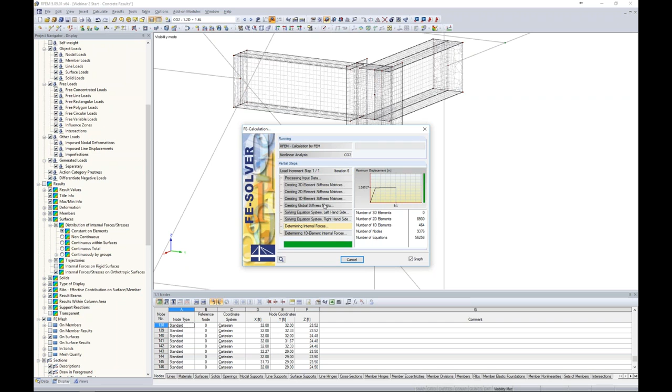So now when I run this same load combination, the program applies these loads to each element within the finite element mesh, and the minute it reaches the yield strength of 50 KSI, that load is distributed to the adjacent FE mesh elements. It continues to do so until the load has been fully distributed. So in reality, we shouldn't see a single FE mesh element here higher than 50 KSI.

Taking a look at our stresses, that's exactly what's occurring. The highest stress here is 50 KSI before that load is distributed to an adjacent element.

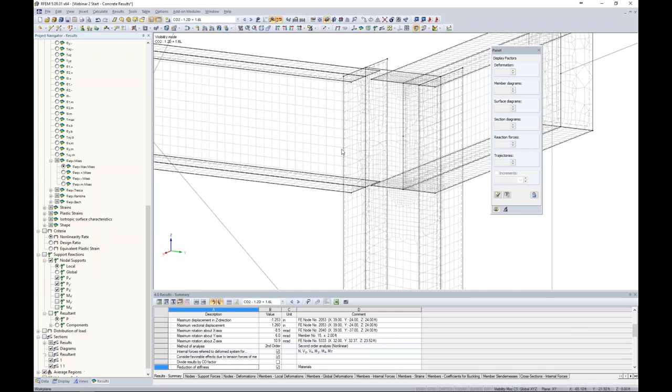We can also now view, under our results tab, an option for criteria since we're running a plastic analysis. Criteria shows us the nonlinearity rate of a single element, so you can see exactly which elements are in the fully plastic state or have completely yielded. Just a little interesting topic—my Advanced Steel Design course goes into much more detail on this if you're interested in a connection like this.

One more quick topic to cover before ending this webinar is a couple of printout report options. The first, which maybe some people didn't know existed even if they've been using RFEM, is a 3D PDF. For example, let's say I'm interested in quickly printing off this connection detail to a 3D PDF.

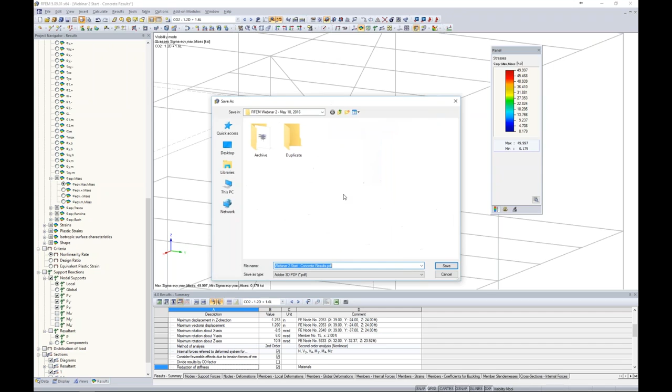I can either go to File, Print Graphic, or use the quick tool under our toolbar called Print Graphic. We can print directly to a printer, print to our printout report, or print to a 3D PDF. When I click OK, it just asks me to save it, and I can save it wherever I'd like. Then it will automatically launch this 3D PDF based on my structure.

When we take a look at this 3D PDF, here's our entire structure, and what's great is that we can now make changes to our view within the actual Adobe PDF program. We can spin it, for example, to take a look at our connection, and use the pan tool to zoom in and really focus on this connection in particular. You can see how this can be beneficial for any type of graphic views for a 3D printout. Then we can email it, add it to a printout report, or do whatever we'd like with it.

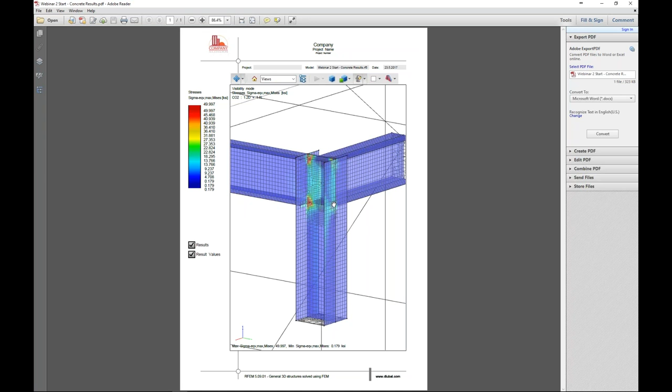Now the other quick topic to discuss is printing off many load combinations at once for our results. I'm going to jump to an already saved model, back to our concrete slab example. Let's say I'm currently looking at my MX forces, and I want to look at all the different load combinations and print this directly to my printout report.

Typically I'd have to take a picture of load combination 7, add it to my printout report, change my load combination, take a picture of load combination 8, add it to the printout report, and so on. So what features make our lives easier? Under the Print Graphic report, we have an option called mass print. I'm going to print to our printout report using the full page width, but maybe use 50% of the height to get a couple of pictures on each page.

Under mass print, this is where all of our model data, loading data, and results data is available. This is basically exactly what we're seeing in our results project navigator. The program assumes we'd like to print what we're currently viewing, so you can see it's showing MX for my surfaces. Instead of the current load case and combination, I want to print all load cases and combinations. I click OK, I click OK.

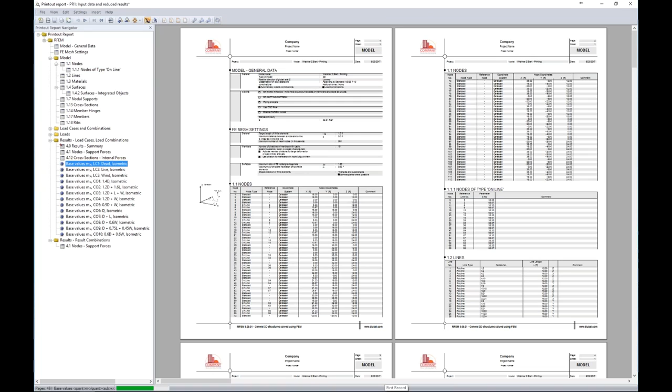Now the program asks me to generate my printout report. I can select one of the saved templates I have. I click OK, and now the program is cycling through all of the different load combinations for my particular mx internal forces of my slab, and it's going to automatically add them to my printout report.

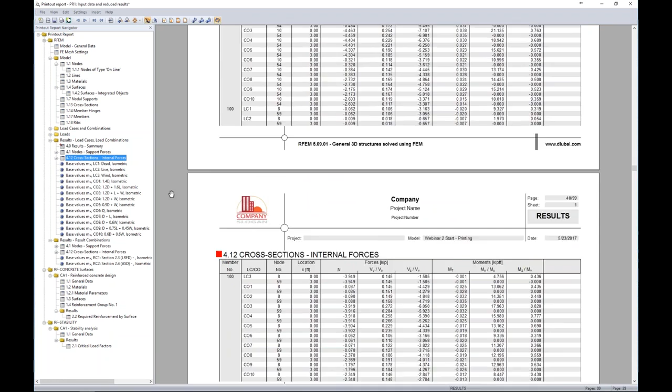Now you can see that we jump directly to where those pictures are added, and I can zoom in to show you guys exactly what's going on. Here's my load case 1, dead load, and my applicable MX forces. Load case 2, and we can get into our load combinations 1, load combination 2, and so forth.

You can see how this can be extremely valuable if we're trying to quickly print off a lot of different load cases at once or results. We can automatically do that.

Keep in mind, you can always right click to edit one of these pictures. If, for example, I don't want to see the FE mesh settings, I can go under my display, scroll down to FE mesh, turn that off, click back, and now you'll see that picture I currently edited is automatically updated to not show the FE mesh.

Something else, a very powerful feature: if I make any changes to this model, including different loads or different cross sections, all of these pictures will update automatically. So I never have to worry about reprinting all of these pictures.

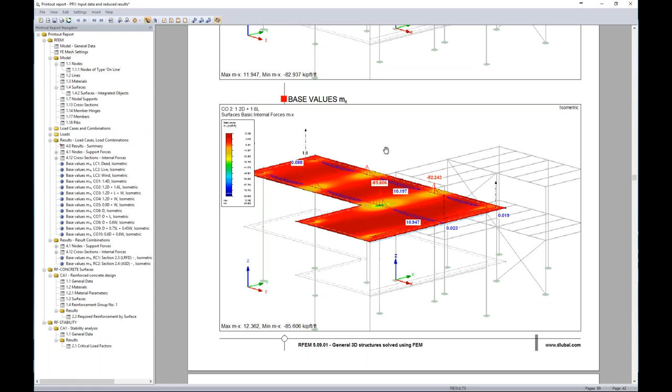I think our printout report is one of the stronger features of our program, especially compared to what you're currently using. You can always add your company logo and company header. You'll see all of the add-on modules are added to the printout report as well.

If we wanted to switch the order of these, for example remember running RF Stability at the beginning of the webinar, if we maybe wanted to have RF Stability in our printout report before our design of RF Concrete Surfaces, all I have to do is select it and drag and drop it, and the program will automatically update the printout report to put RF Stability before RF Concrete Surfaces. Just a very powerful feature in terms of our printout report.

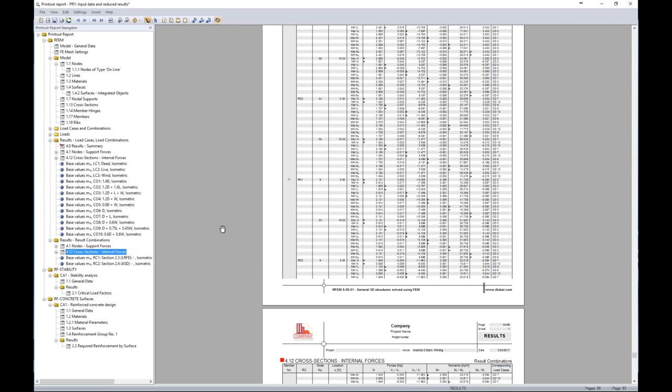With that said, we can jump back to the PowerPoint to conclude our webinar today.